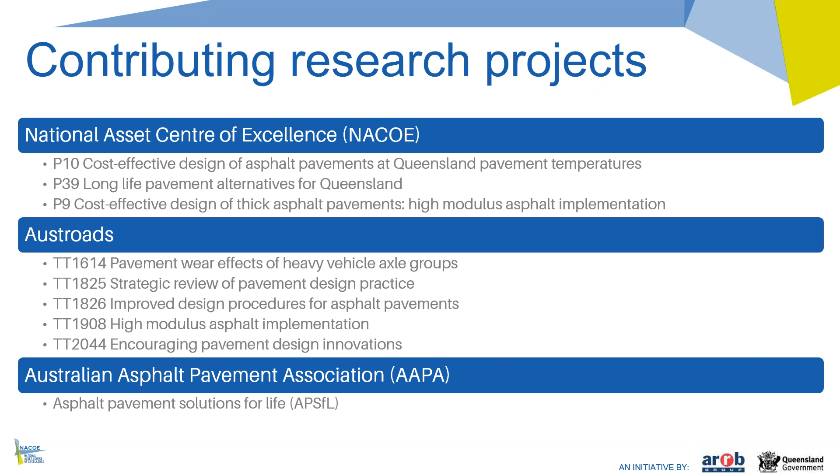Thanks, Angela, and welcome to everyone to this webinar on a new approach to asphalt pavement design in Queensland. A lot of asphalt pavement design related research has been undertaken in recent years, including by Austroads, the National Asset Centre of Excellence and the Australian Asphalt Pavement Association, with the key relevant projects listed here. The research has generally shared common goals, which are to reduce the cost of asphalt pavements and achieve value for money, and generally improve the pavement design process to better match field performance. There have been many linkages between these projects, as well as linkages to international research, in particular in the US and Europe.

This webinar is brought to you by the NACOE P10 and P39 projects. The P10 and P39 projects, as well as covering their own unique parts of the overall asphalt pavement design puzzle, have done what none of the other projects have yet done, and that's bring all the relevant parts of these projects together. And that's the draft technical note that we are now releasing to our internal and external stakeholders for input prior to it being finalised.

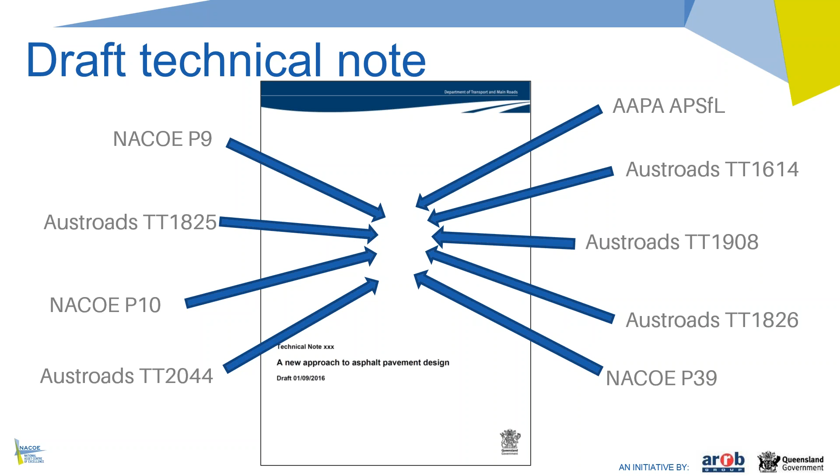We have run some longer sessions with stakeholders explaining the changes in quite a bit of detail. This webinar today is a condensed version of those presentations and is aimed at providing an overview of the changes. While it's anticipated that many aspects of the new procedures will eventually go into the Austroads guide, in TMR we are keen to reap the rewards of this research as soon as possible, which is why we have developed this technical note.

The draft technical note can be summarised into four main changes compared to current pavement design procedures. The first main change proposed is defining the asphalt design modulus through the use of a flexural modulus master curve. Eric will cover this aspect in a moment. The second main change proposed is to allow the use of a mix-specific fatigue relationship in pavement design, which would be done in conjunction with the mix-specific modulus. Eric will also cover this change and the background behind it in more detail shortly. These first two changes allow a clear and direct link between asphalt mix design and pavement design.

The third main change proposed is an upper limit on design traffic in asphalt pavements, and Jeffrey will cover this in a bit more detail shortly. The final main change proposed is a new approach to considering multiple axle group loads, where strains are calculated under every axle in the traffic load distribution rather than under a standard axle, as is the current approach. I'll tell you a little bit more about that later.

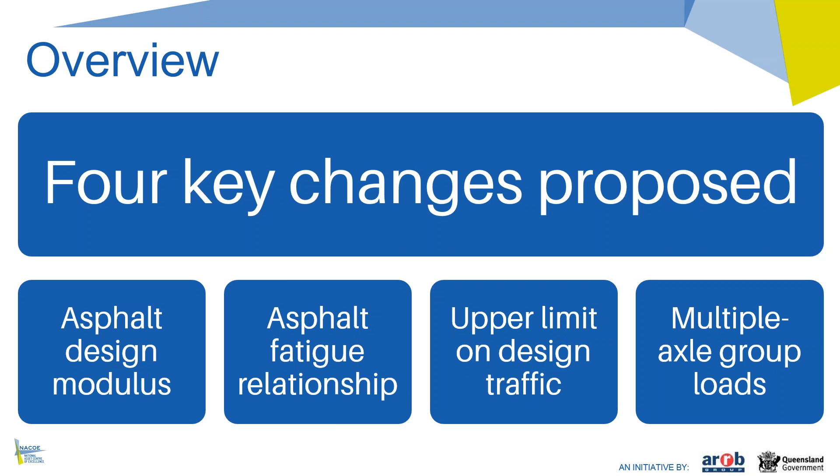As well as benefits in reducing pavement costs, the changes provide a more fundamental design approach with better links between the asphalt mix design and pavement design. Therefore, the proposed changes are ideally suited to the introduction and assessment of innovations, including better engineered mixes like EME2, which is not easily possible with our existing procedures.

Why do we want to make these changes in Queensland? In summary, we are implementing research that's identified improvements to the way pavements are designed, which has benefits in reducing costs and encouraging implementation of innovations.

A 30-year design traffic loading of over 150 million ESAs. Using the 2009 pavement design manual, the asphalt thickness would have been about 430 millimetres for a full-depth asphalt pavement.

Between 2009 and 2013, there was concern that asphalt thicknesses were not providing value for money, and changes were made in 2013 specifically aimed at reducing asphalt thickness, through the 2013 pavement design supplement. Using that supplement, the thickness for this same design example would reduce from 430 mils down to about 370 mils.

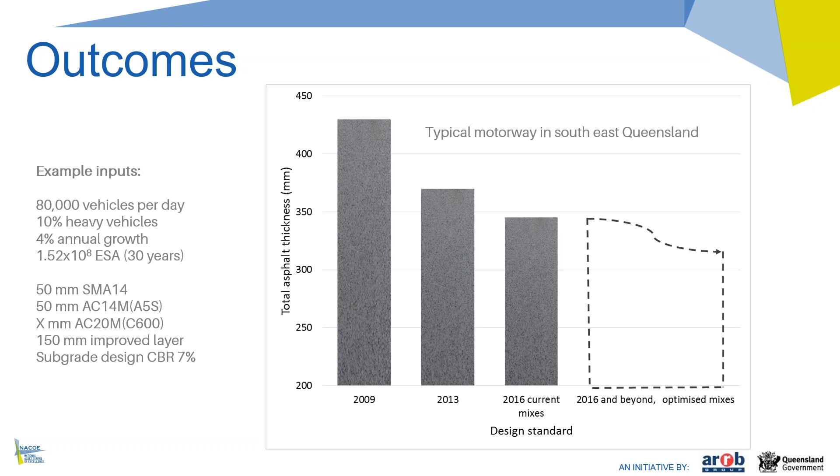My presentation this afternoon consists of two parts. First, I'll be talking about developing mix-specific flexural modulus master curves for use in pavement design. Then the second part will be presenting the mix-specific fatigue models that we can develop under this tech note.

This presentation will get very technical very quickly.

Key messages I would like everyone to take away: first, what we're proposing fits very well within our current design framework, be it Austroads or the TMR supplement. Second, it may seem like a lot of additional testing in the laboratory, but in reality it's not that much more - we're talking about a couple of additional tests compared to testing for a high-performance mix design such as EME. So the additional work needed is actually quite limited.

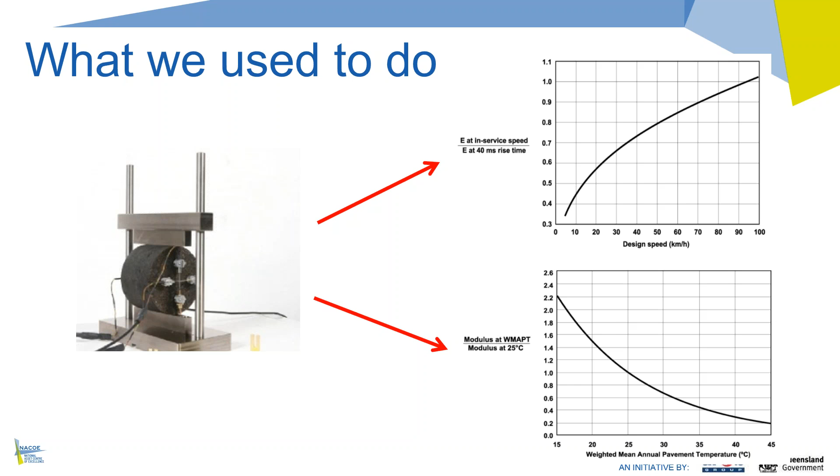Okay, so with that I'll start my presentation. Let's first recap what we used to do within the current Austroads design framework and the TMR supplement: resilient modulus testing. We do a resilient modulus test at one temperature and one load frequency, and then we use the Austroads equations to predict from that one test result the flexural modulus of the material at a range of different temperatures and loading speeds. The important thing there is that we're testing in a single condition.

...we shift those results in the frequency space to form a continuous master curve. By doing that shift, we then have the relationship between temperature and frequency, and we can convert between the two, and use this master curve to predict the design modulus at any combination of temperature and load frequency. So that is the master curve in a nutshell.

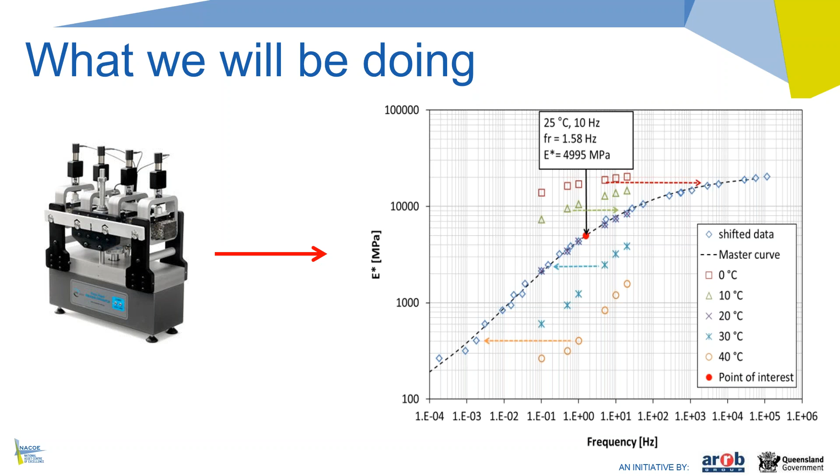I'll be going through the construction of it a little bit later, although not in much detail. So if you lose track, don't worry - the test method explains exactly in the tech note the steps that are involved in this.

So why were we doing that? Well, first of all, if you compare this to what we have been doing, we're running the tests over a range of temperatures and frequencies, and therefore we're better characterizing the material. The master curve better represents the flexural modulus over a range of temperatures and frequencies compared to our current method.

This will also result in a higher modulus at elevated temperatures, mainly because our current Austroads method underpredicts the modulus at high temperatures and low frequencies, which is obviously very important for a warm climate like Queensland. We also get more realistic values at low temperatures, as I'll show on the next slide.

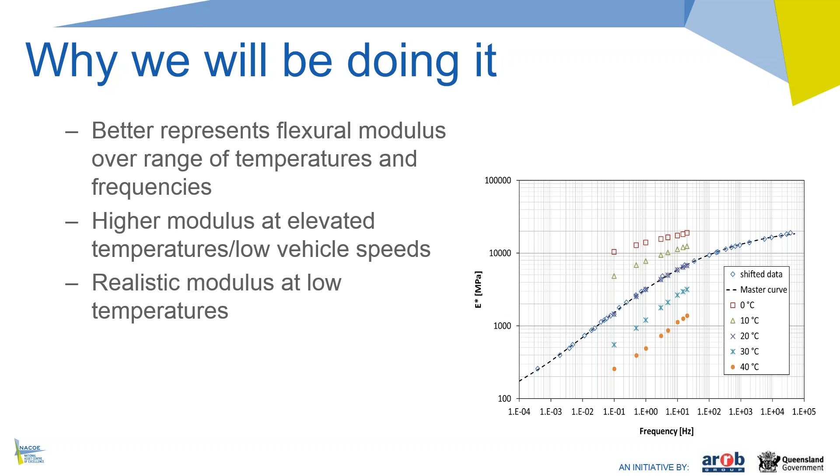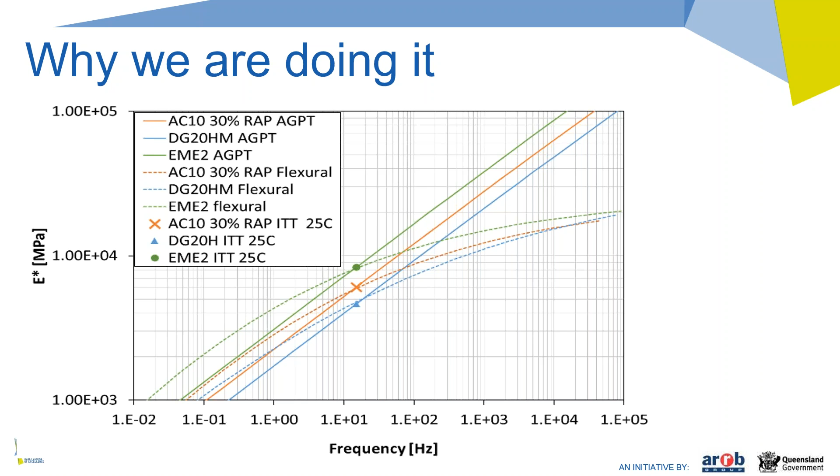If we use the Austroads method, that results in a straight line, so the straight lines on this chart represent the Austroads method. Because this is a log scale, it comes out as a straight line. The actual measured flexural modulus that we've measured in the laboratory is also shown on the graph - those are the dashed lines. As you can see, on the left of the graph, that's the high temperature and low load frequency domain, the modulus values from the actual measured flexural modulus are higher than what's currently predicted in Austroads.

So that brings us to why we're doing it. These higher moduli lead to reduced pavement thicknesses, especially in climates like Queensland.

The mix-specific master curves open doors to innovation. Instead of assuming a relationship between temperature and modulus, we can now actually test it, and that means people can optimize their mixes to get a better outcome.

I believe this reduces risk, because instead of taking a measurement at a single temperature and single load frequency, we're now characterizing the material over a wider range of temperatures and frequencies, and therefore have a better understanding of the resilient response of the material in different combinations. So we have a much better characterization of the material than we used to have.

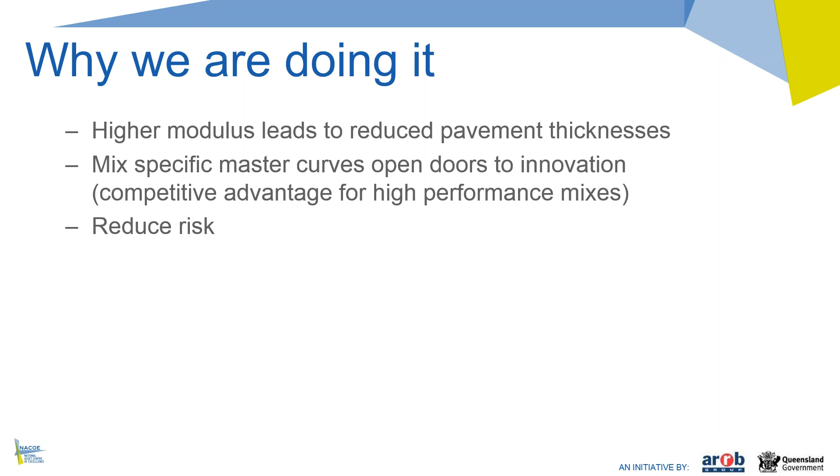Well, first of all, the basis for the modulus in the Austroads design guide has always been the flexural modulus.

The flexural modulus in the Austroads guide is estimated from a resilient modulus value. The reason Austroads uses flexural modulus is because it's based on the Shell design method from 1978, which also used the flexural modulus.

Some of you may be familiar with the Shell nomographs, which can be used to predict modulus from binder properties. Those nomographs are actually also based on flexural modulus values. So use of the flexural modulus is completely consistent with our current design method.

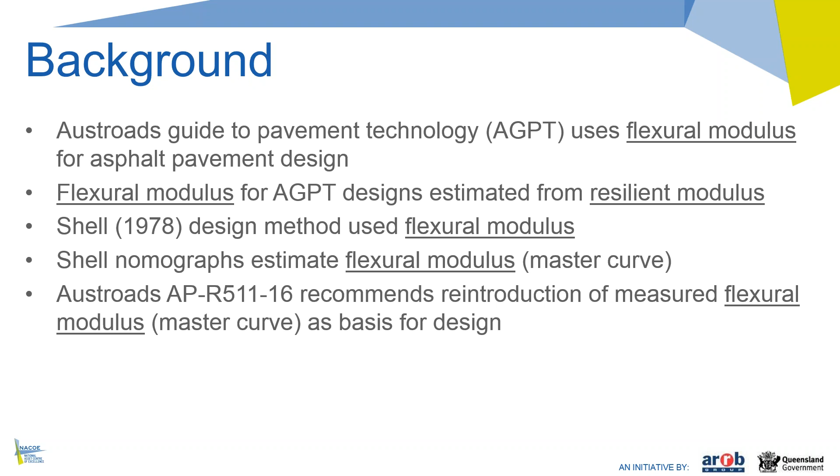A recent Austroads project that we've completed also recommends the use of a flexural modulus master curve, much the same way as we've just discussed here, as the basis for design within the Austroads guide. So we're just implementing it early, as it were.

That brings me to the test method. For those not familiar with the 4-point bending test method, all it is - we produce an asphalt beam in the laboratory, hold it at the ends, then introduce a sinusoidal displacement load on the inner clamps and measure the modulus at a low strain value.

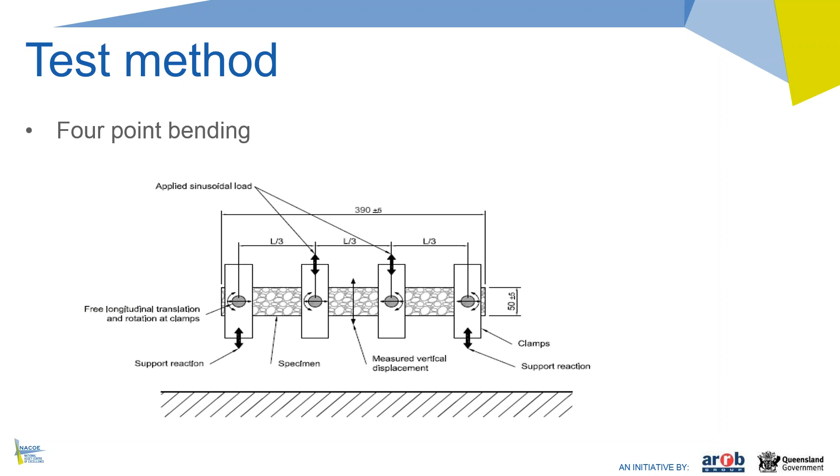The test method we'll be using is the recently introduced AGPT T274, which replaces the earlier AGPT T233 that you may be familiar with. There were some changes required because we need to measure the modulus at small strain. The previous test method, AGPT T233, is really a fatigue test method.

That means you're applying damage from the first load repetition, and that's really not what you want to be doing in modulus testing. We want to do modulus testing in a strain range where you're not imparting any damage on the sample, so that's why we needed to change that.

It also has procedures to do that temperature and frequency sweep. We'll be using a sinusoidal wave shape instead of the Haversine wave shape used in T233, and I'll get to why that's important when we discuss fatigue testing. Finally, it includes a procedure to construct these complex modulus master curves.

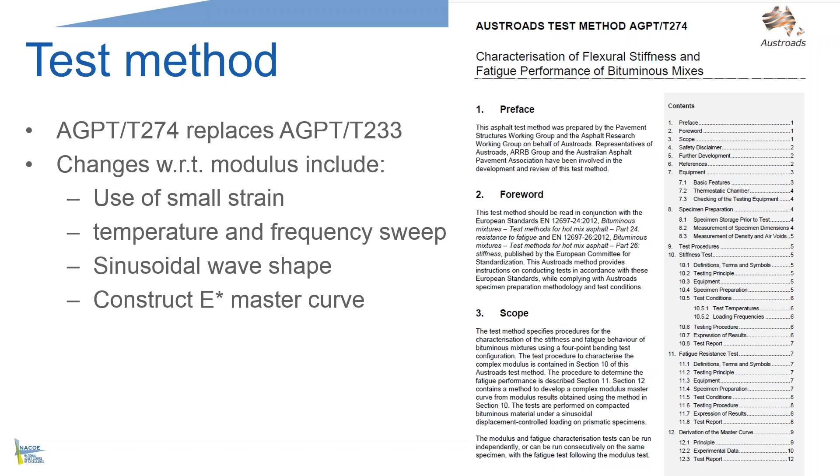The value of the complex modulus is actually not that much different for normal mixes, at normal temperature and frequency ranges, than the flexural stiffness. However, it's not the same, and that's basically the difference.

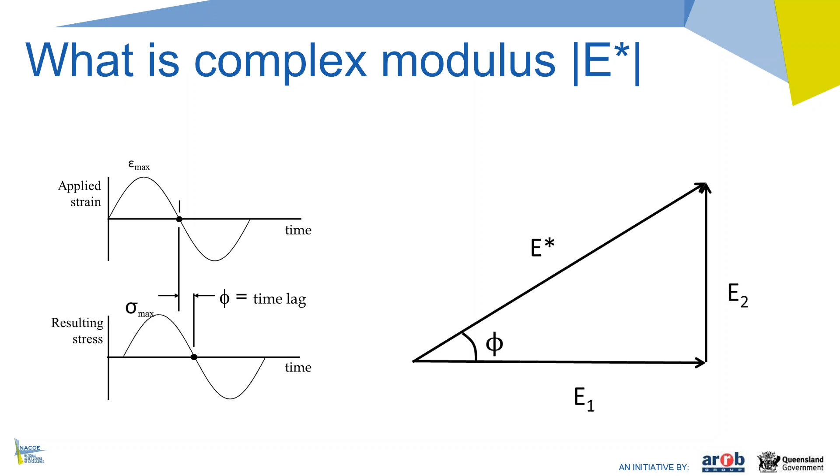That brings me to the test method. If we're developing a master curve for pavement design, we want to do a temperature and frequency sweep over as wide a range as possible. How wide depends predominantly on your equipment—the temperature cabinet determines the range of temperatures you can stabilize, and whether you're using pneumatic or hydraulic equipment determines the range of frequencies with a robust load signal. Hydraulic equipment typically can impart load signals at much higher frequencies than pneumatic equipment, but both can be used for this test method.

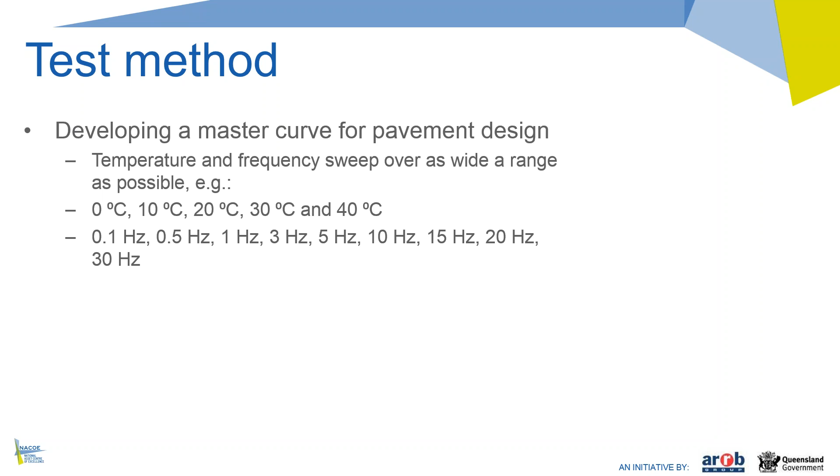That brings me to master curve construction—I'll quickly summarize how that works. As I said, you run tests over a range of frequencies at each temperature, then we take those results and shift them in the frequency space to form a single curve, as shown in this figure.

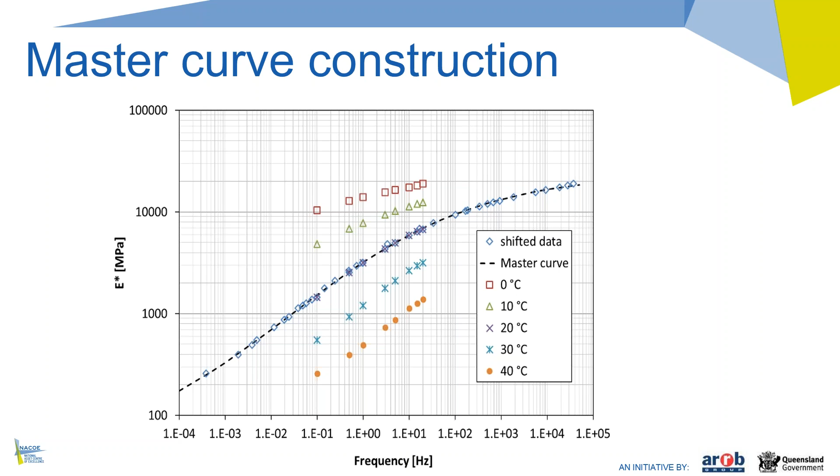We're fitting that data to a sigmoidal model. There are other models available from the literature, but the reason we went for this one is that it's used in the American Mechanistic Empirical Design Guide as well as the Californian Mechanistic Empirical Design Guide. That's the only reason—other models are also suitable, but we chose this one, and they all give a similar answer. So the sigmoidal model is shown there.

The shift of the different frequencies in the frequency domain is done using the reduced frequency, changing the test frequency to the reduced frequency with the temperature shift factor, which is also fitted to the data. The crux of the master curve construction is solving the regression parameters in these different equations at the same time, which can be done in an Excel spreadsheet using the Microsoft Solver function—quite straightforward to do. But I'm not going to go into that right now.

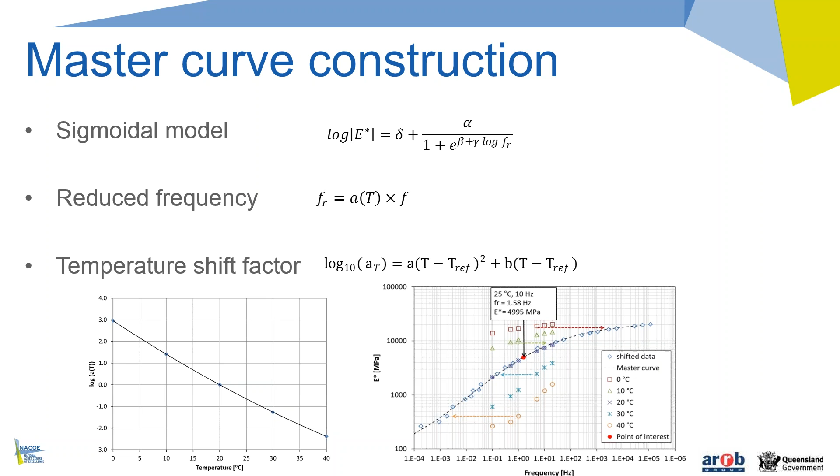Eric, can you explain how you get the design modulus for a certain traffic speed and temperature from that master curve? Yes, it's very similar to what we currently do with those relationships in Austroads. We calculate the frequency under the traffic speed using the current Austroads equation, set the master curve equation's temperature to your design temperature—the weighted mean annual pavement temperature—and then correct the resulting modulus value for the design air voids content you're looking for.

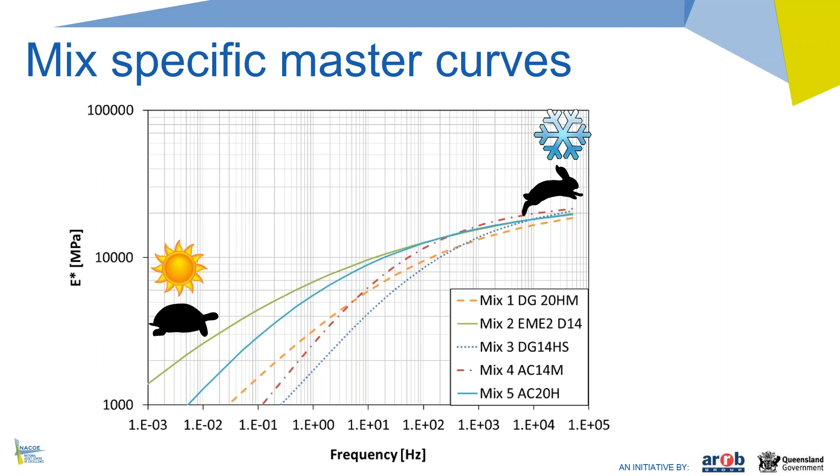What we can also do is incorporate default values. The current TMR design supplement has default values for different mixes, and we've converted those correction factors, Austroads for temperature and load frequency, into a master curve. The graph on the right shows you that if you take those two Austroads correction factors for temperature and load frequency, you can come up with a master curve to cover them both, and you can still use resilient modulus results and put those values into a master curve.

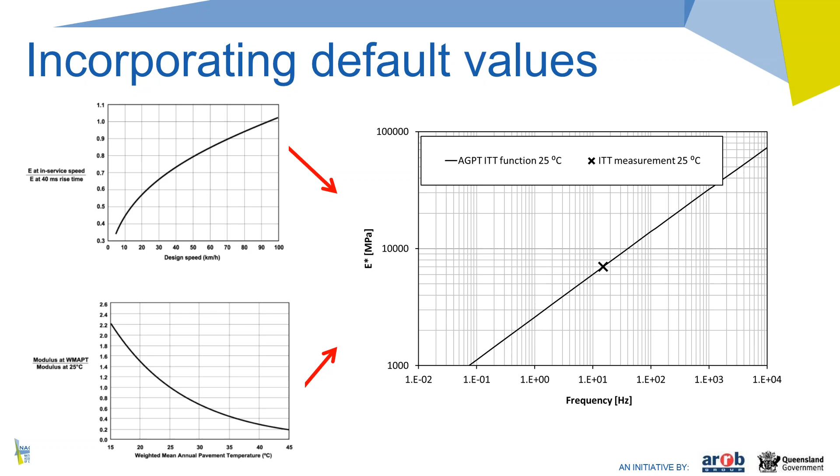Obviously, the results you're going to get are not more accurate than the current Austroads method. The main difference is that you can consistently use master curves instead of the resilient modulus results.

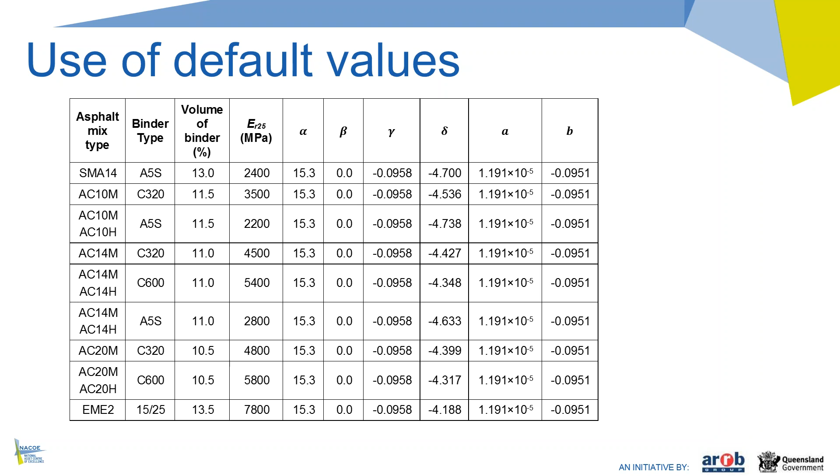So this is a table in the design supplement showing the default master curve parameters for the different mixes, typical mixes used by TMR, as shown in the left column, and it gives you default master curve values. But obviously this will just end up with the normal Austroads relationship, as I've shown on the previous slide. It can be used with default values as well.

We have time for questions at this stage.

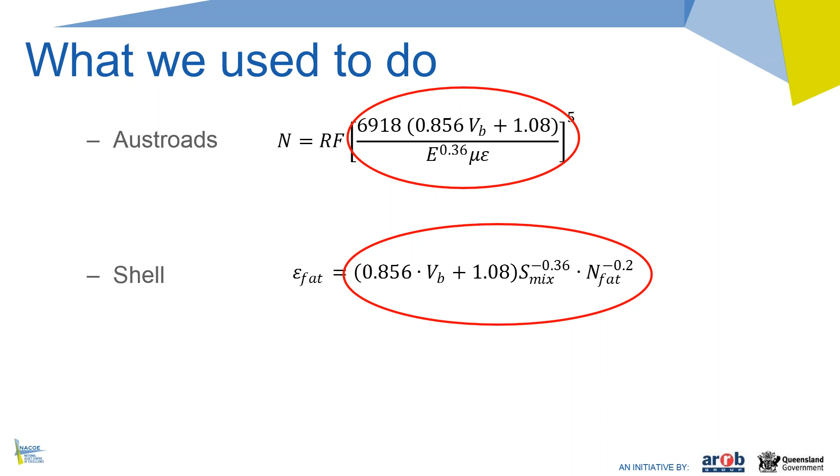So this part, the last part of the Austroads equation and the Shell fatigue relationship are the same - they provide exactly the same outcome. The Shell laboratory model is currently used in the Austroads fatigue equation, and all we do is we have a shift factor to shift the laboratory performance to field performance.

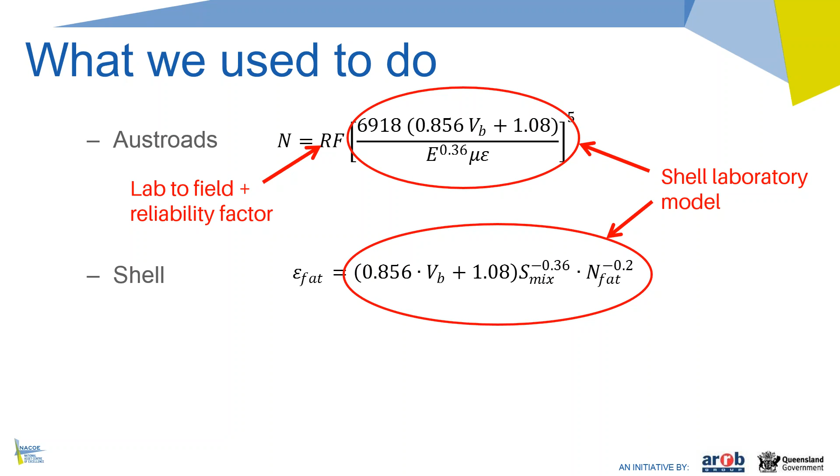Now you could argue that you could replace that general laboratory model, which was developed again on 12 mixes in the 1970s, with a mix-specific model and use it in exactly the same way. So that's what we'll be doing - running tests in a 4-point bending setup, testing at different temperatures, then fitting a single model to those tests at different temperatures, making the fatigue performance a function of the modulus of the material again, to account for the effective temperature and load frequency.

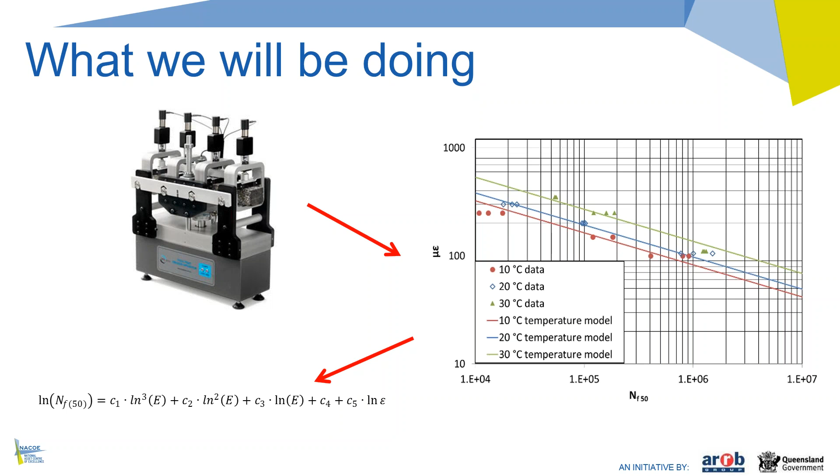Why will we be doing that? Well, we want to encourage the use and development of mixes with superior fatigue performance - think, for instance, of EME2.

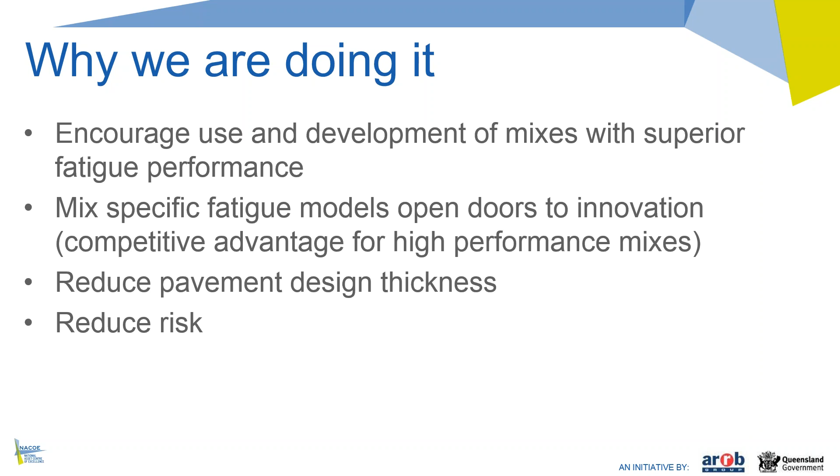Mix-specific fatigue models also open the doors to innovation, so it will now be possible to develop your own mixes with superior fatigue performance and characterize them and use them directly in pavement design, which then, of course, hopefully will again lead to reduced pavement thickness, and as a result save the taxpayer money. In my opinion, this will again reduce risk, because instead of using a general model based on the mean performance of 12 mixes tested overseas, we will now be using models specifically developed for Australian mixes.

This is another slide on why we were doing that. The whole reason we started this project is because according to the current Austroads design method, as the temperature goes up, you need more asphalt to get the same fatigue performance.

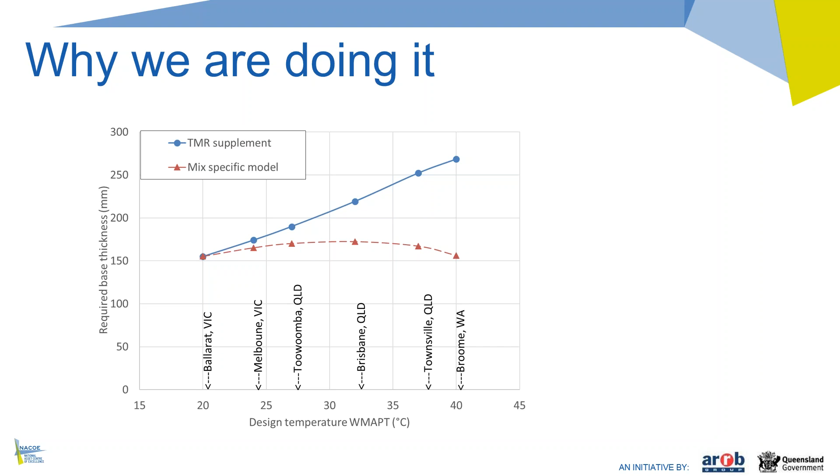And the Queensland taxpayer as well.

Taking a step back, the reasoning why we argue we can do this within our current design framework is that the design method in the Austroads Guide to Pavement Technology uses the Shell 1978 laboratory model to characterize the fatigue performance of asphalt mixes. That laboratory model is based on the mean performance of 12 mixes.

Provided we use suitable test conditions similar to what Shell used, the general model can be replaced with a mix-specific model. To allow that, we did need to make changes to the test method, and that is one of the reasons why T233 was replaced with T274.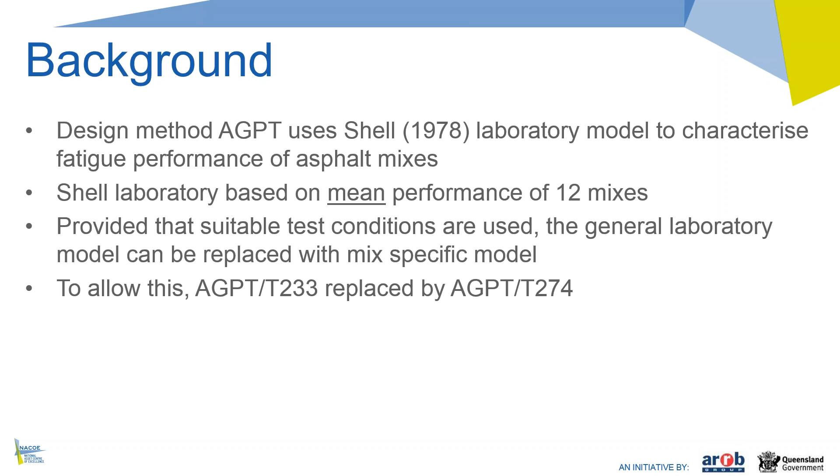Changes in terms of fatigue testing include that we'll now be testing with a sinusoidal wave shape instead of the Haversine. The reason is that the Haversine wave shape used in T233 in effect resulted in a sinusoidal wave of half the intended amplitude, and therefore you would draw completely the wrong conclusions if interpreting that data.

We'll be testing a minimum of 18 specimens per result, and if testing at a different temperature, we'll be testing slightly more, which we'll discuss later. There are also improvements to general calculation and engineering properties I don't have time to go into. But for clarity, results you may have for mixes historically tested under T233 cannot be used with this current tech note—you have to test in accordance with T274.

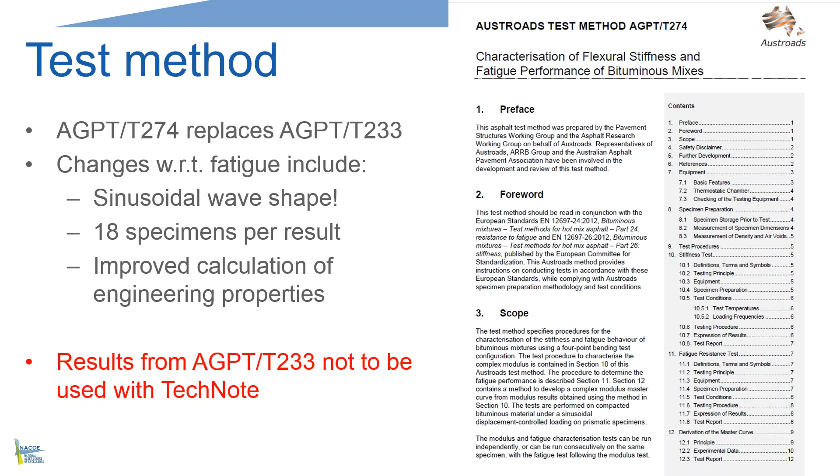For tests to develop mix-specific fatigue models in accordance with the tech note, we need to test 27 beams equally divided over 3 temperatures, 9 beams per temperature, at 10, 20, and 30 degrees C, which gives us enough statistical confidence to fit our model to the data.

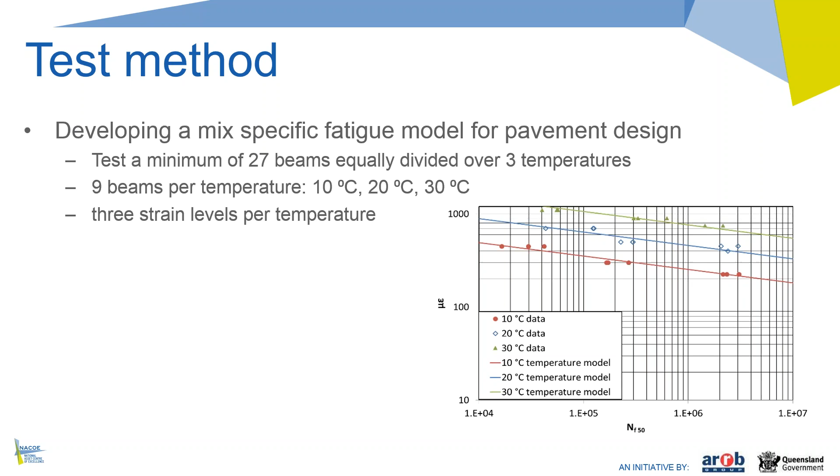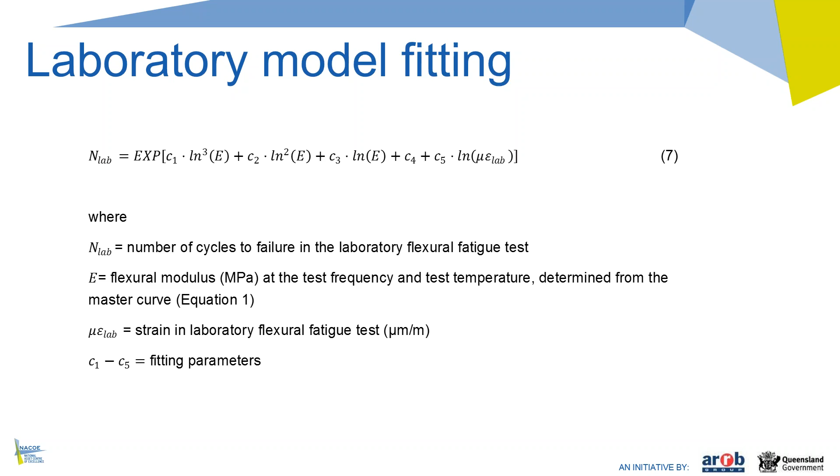The model we'll be fitting looks like this. It's slightly different from the Shell model, which was basically a 3-parameter model—this is a 5-parameter model. The reason for using this model instead of the Shell-type model is that it's more sensitive to temperature changes. You'll be fitting this model to your fatigue data and solving for the 5 different regression parameters, C1 to C5, to come up with a mix-specific laboratory model.

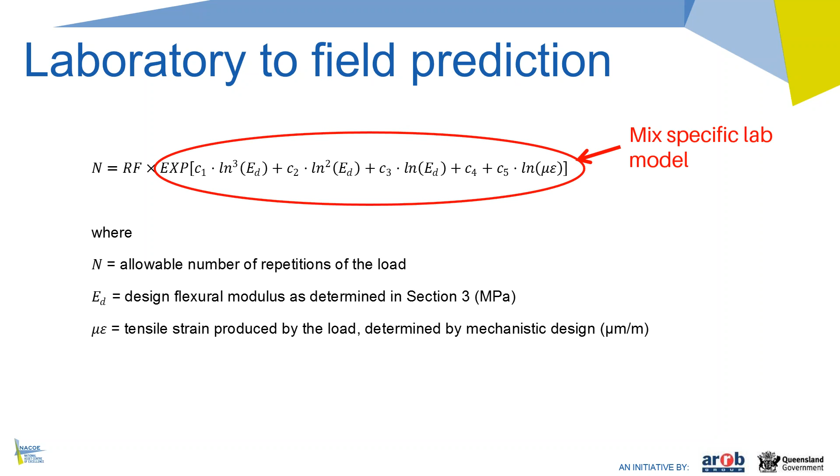Once we've got that laboratory model, we need to predict field performance from it, which we'll do using the same reliability factor. So all we're doing is replacing the Shell general laboratory model for mean performance of 12 mixes with a mix-specific laboratory model, and using the same laboratory-to-field shift factor to predict field performance from that laboratory performance. Thank you.

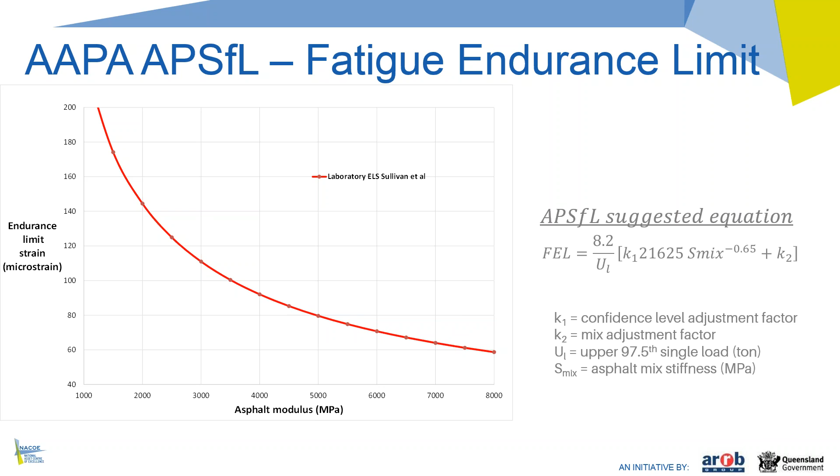As I've mentioned previously, there's this Austroads TT2044 project ongoing, and in June 2016 a discussion paper titled 'Asphalt Fatigue Endurance Limits: Guide to Implementation Options' was presented. In short, other than providing a review of the AAPA method proposed, there are 5 options being presented to look at possible ways of incorporating this in the next Austroads Guide to Pavement Technology.

So in short, right now the most probable option that we can readily implement in Queensland would be option D. Basically, without specifically looking into the fatigue endurance limit, we are capping the design traffic in our solutions.

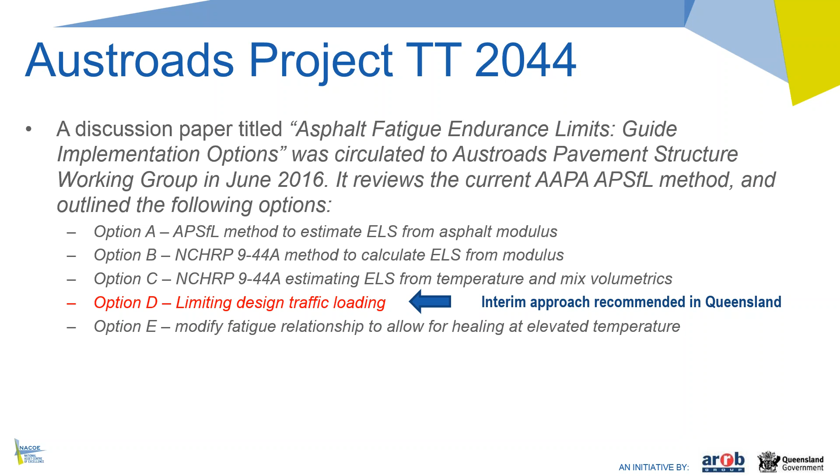It's important to realize that in this technical note we are presenting, for pavement that we expect to last very long, we really need to have very good foundations. Therefore, in the technical note we require that there needs to be an improved layer, as well as any additional select fill if required, so that the top of the improved layer has at least a minimum of 150 MPa, so the asphalt block at the top would have good support.

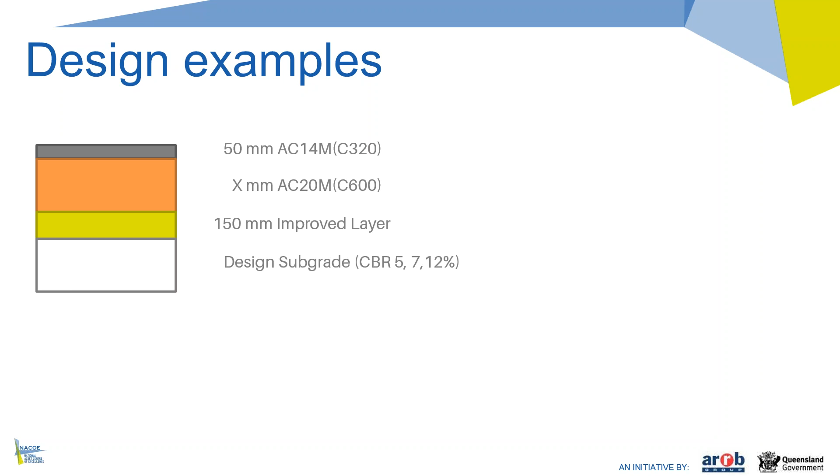With that example, basically at 200 million ESAs, I'm proposing to cap off the asphalt thickness at that traffic, and this limit has been set particularly considering the southeast Queensland temperatures, because for thick pavement that we are looking at here, most of them would be sitting in the southeast corner of Queensland, within the state.

One thing to notice is that this 200 million ESA is consistent with the current discussion in TT2044, which recommends that for the WMAPT between 26 to 34 degrees, they're also suggesting 200 million ESAs as the cap. If we put in the thickness calculated by the AAPA method, all these are quite comparable. That concludes my part of this, and I'll hand over to Peter.

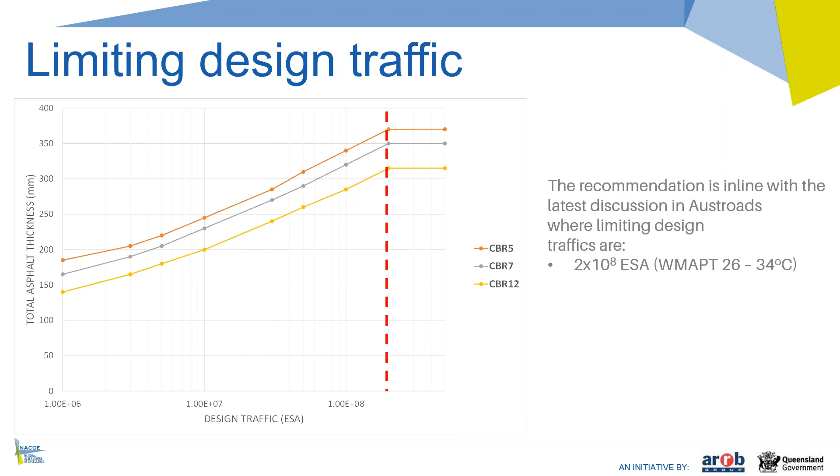Before that, any questions, I'm happy to answer.

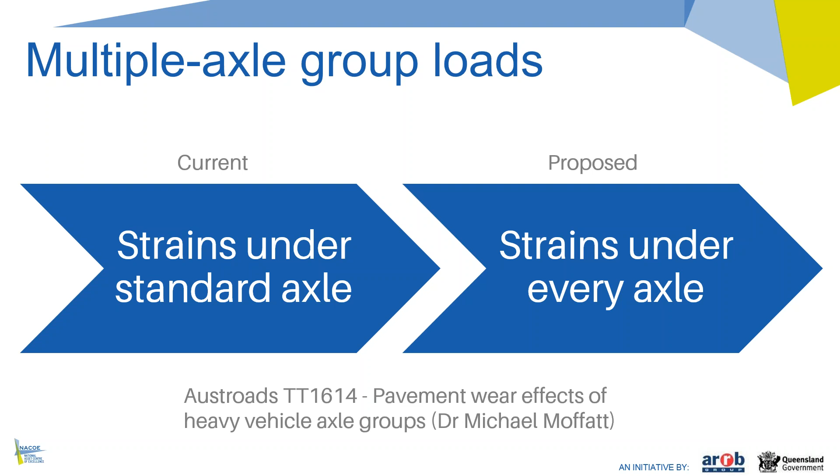In the current Austroads method, all loads in the traffic load distribution are converted to a number of standard axle repetitions that are assumed to cause the same pavement damage as the actual traffic, and that conversion is done using what are called standard loads.

The standard loads are based on peak surface deflection for different axle group types being the same as under a standard axle. That means axle groups causing the same surface deflection are assumed to cause the same pavement damage.

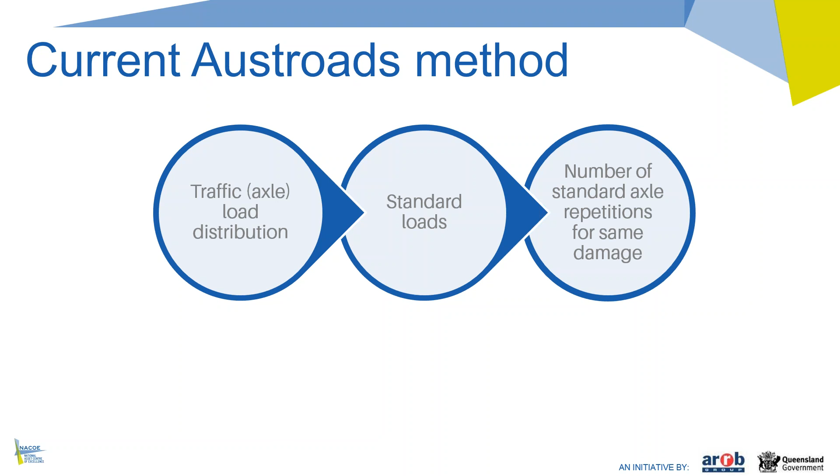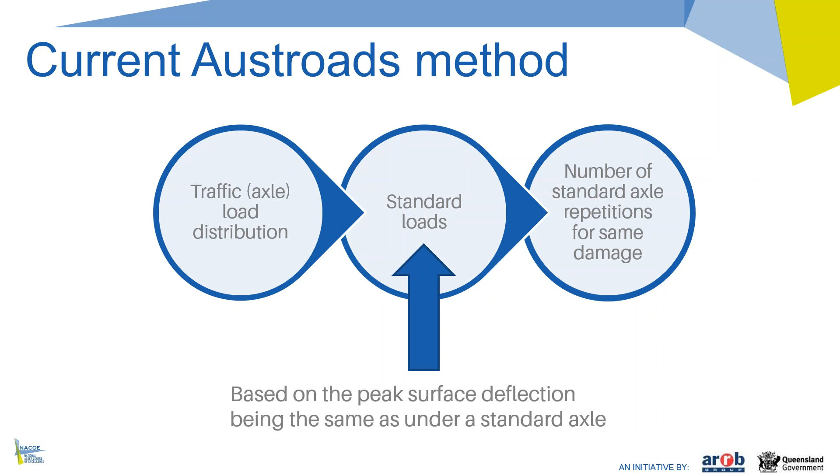However, Michael Moffatt's research demonstrated that the standard load varies with pavement structure in bound pavements. The use of deflection as an indicator of damage of bound materials is therefore questionable.

The research recommended that pavement damage should separately consider each axle load and group within the traffic load distribution, by calculating strains under each individual axle without any conversion to standard axles.

So we're proposing to introduce this new method for the assessment of asphalt fatigue damage in conjunction with the other changes that Eric and Jeffrey have covered.

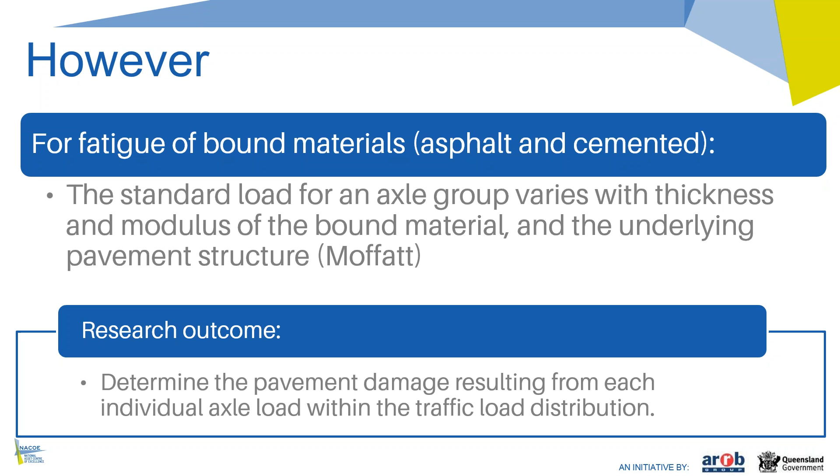This now leads me to briefly describe the new method. It's fully detailed in the technical note, with a worked example for a full depth asphalt pavement. The first step is simply defining the pavement structure, including the material inputs to be used, which is no different to what we currently do.

The second step is in two parts, and this is the method for determining the strains under each individual axle in the traffic load distribution. Firstly, the designer calculates the critical strains in the asphalt under both a single axle with single tyres and a single axle with dual tyres.

This still only requires one CIRCLY run, except now with two load types rather than one. The tech note defines the axle loads, tyre spacings and contact stresses to use.

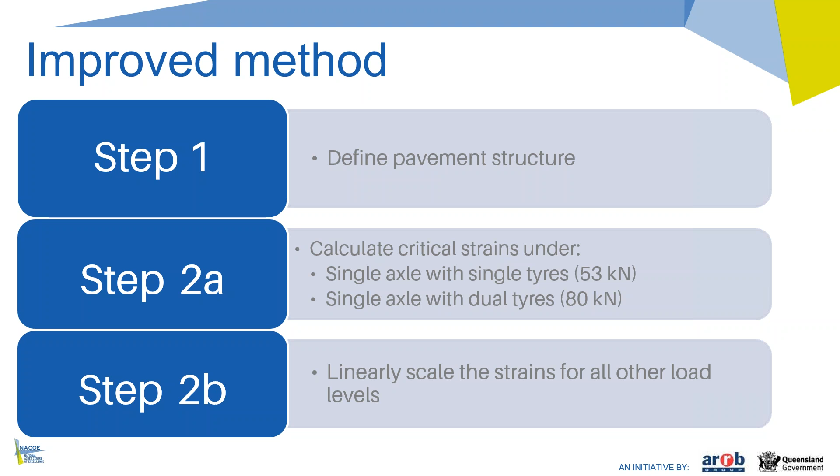Then in step 2B, the strains from step 2A are linearly scaled to give the strains at all load levels. Linear scaling is possible because the Austroads method is based on a linear elastic model, where strains are linearly proportional to the applied load.

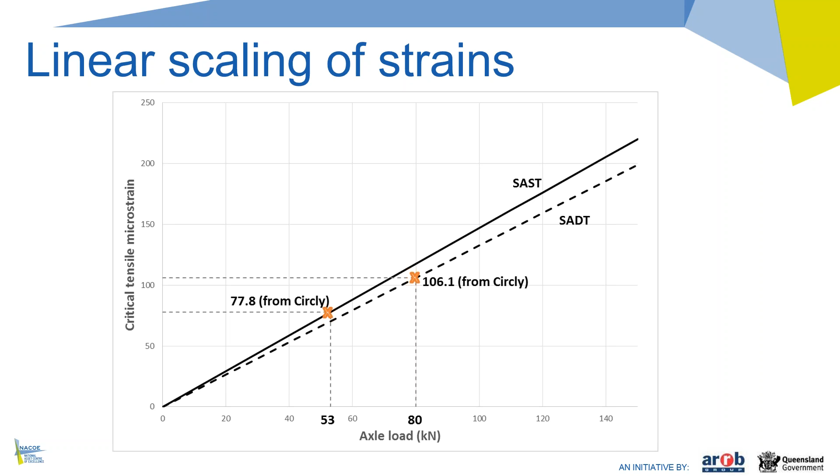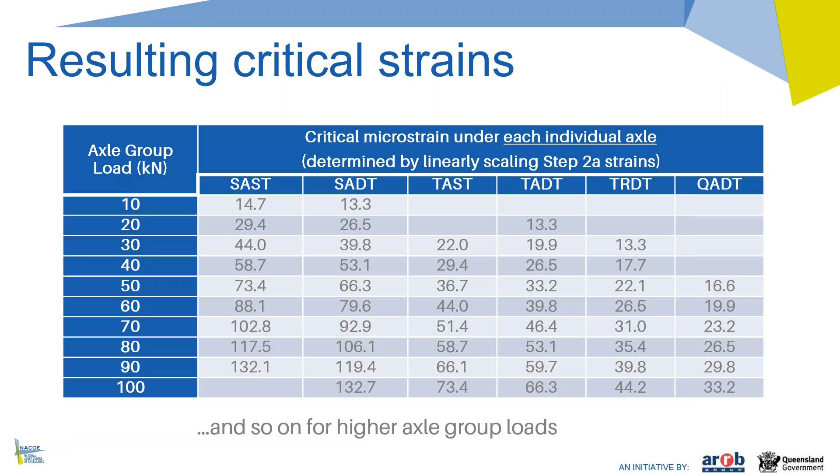The next step, using the strains from the previous page, that's done using either the normal shell relationship from the Austroads guide or the mix-specific relationship that Eric discussed.

Using the strains under individual axles, the performance equations will give the allowable number of individual axle loads. But we actually want the allowable number of axle group loads. So there's an additional term, 1 divided by n, included in the performance equation to divide by the number of axles in the group, n, giving the allowable number of axle group loads.

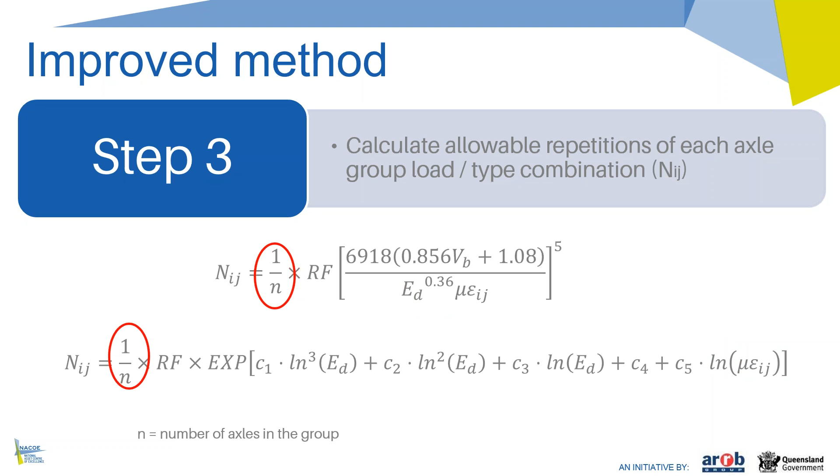And then we can compare that with the design traffic, which is also in terms of the expected number of axle group loads. We repeat this for every combination of axle group type and load level, and that can easily be automated in a spreadsheet.

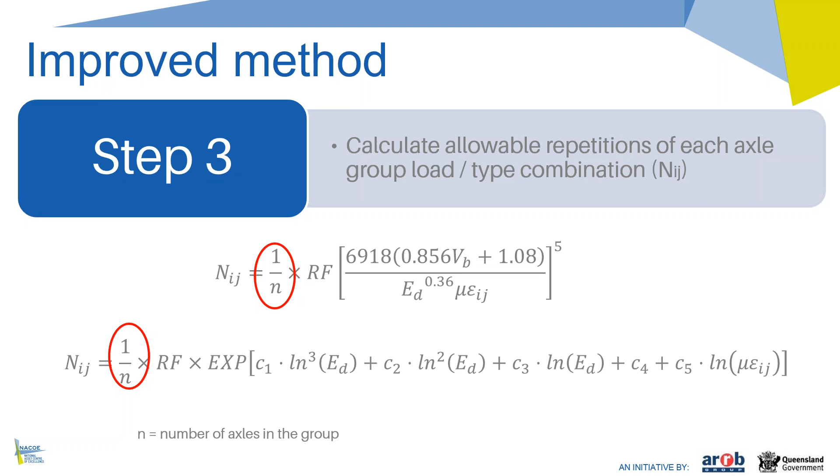The asphalt fatigue damage is then calculated for each combination of axle group type and load. This is done by dividing the expected repetitions, which is the design traffic for that combination, by the allowable repetitions from step 3.

This is very much the same or similar procedure as what's used in the current Austroads guide for concrete pavements. The total damage is then the sum of all damage for each combination of axle group type and load level, and this must not exceed 1 for the pavement to be acceptable in terms of asphalt fatigue damage.

So that completes the assessment of the asphalt fatigue damage part of our design. The other aspect is to consider loss of surface shape, often called subgrade deformation, and that also needs to be checked. I won't go into the details here, but that's all explained in the technical note as well.

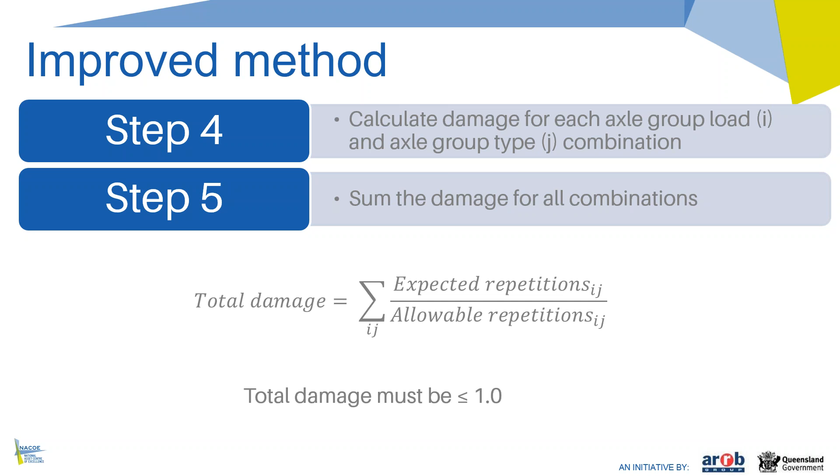The top diagonal line shows the required asphalt thickness using the current 2013 pavement design supplement and Austroads pavement design guide for a full depth asphalt pavement. The middle line then shows the required thickness when the new multiple axle method is used, 200 million ESAs that Jeffrey covered.

The difference between the top and middle lines is the reduction in asphalt thickness that will be able to be realised immediately, and that's even without the mix-specific design approach that Eric described. Optimising the mixes for fatigue performance will lead to a further reduction in thickness, somewhere below that middle line. The bottom dashed line illustrates just where that line could be with the right mix.

We can also see from this chart that the traffic limit of 200 million ESAs that Jeffrey discussed, if you look at the middle line, is on the basis of using this new traffic method. So in this case, for this example, giving a thickness of 350 mm of asphalt.

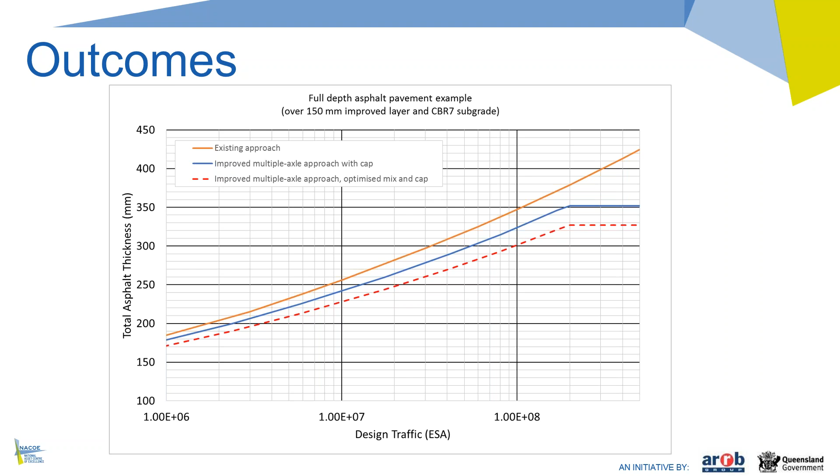So that's a pretty quick fly through of that method, but as I said earlier, there's a lot more detail in the technical notes as well as a worked example which fully details the method and also brings in the bits that Eric talked about, the master curve and the mix-specific fatigue relationship, all into one example just to show how it all fits together.